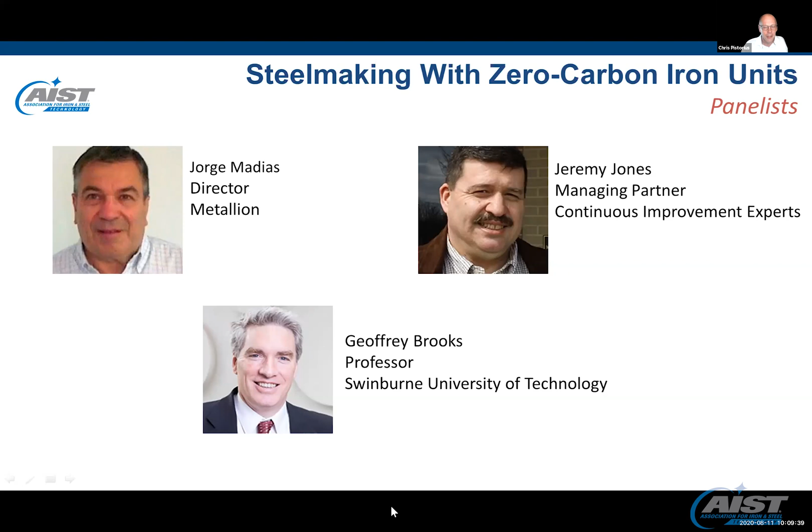Okay, so this morning we had a number of questions ahead of time as sort of a guideline. And one of them was, what are the greatest challenges for carbon-free DRI in EAF steelmaking?

Well, in general, as we try to move towards this low carbon footprint steelmaking, what we need to do is return to a lot of the fundamentals and understand why various technologies were adopted and adapted into the EAF, and how do we provide that same functionality without carbon-based materials.

So this involves things like the reason why we put burners in an EAF: we were trying to eliminate cold spots so that the scrap melted in more evenly, and we could achieve an efficient endpoint, achieving the temperature and carbon level in the bath at the same time.

So if we don't use fossil fuel to provide energy at those cold spots, do we use hydrogen-based burners? Do we use maybe ammonia-based burners? Do we use plasma torches? There are a number of different options which we'll have to look at.

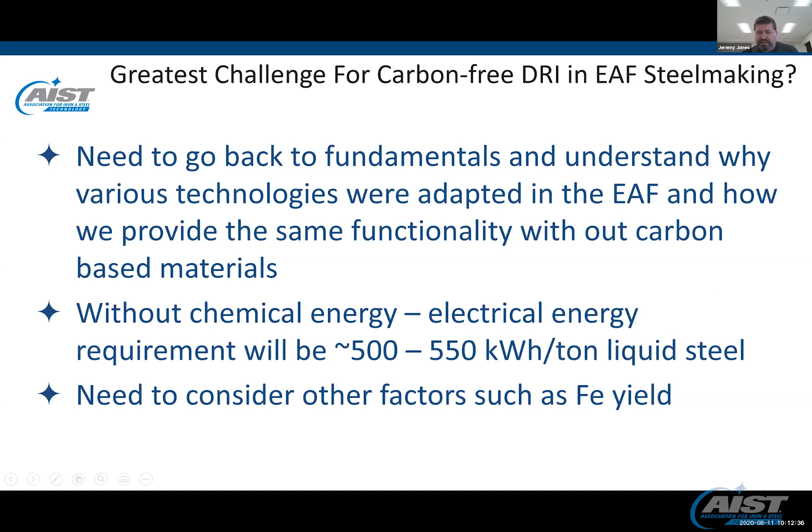Some alternative melting technologies have been proposed, including induction melting, but currently induction furnaces are limited to about 60 metric ton heat size, so that wouldn't really be suitable for a lot of product lines. But we'll have to look at it. There will be some application in smaller sized facilities, maybe some more specialized ones.

But moving forward, I think the EAF is a preferred technology, but it's going to go through an evolutionary process, and I think Geoffrey's going to talk about that a little bit. We could try to come up with a hydrogen-based pyromet process, and there have been, obviously in the past, hydrogen-based direct reduction processes that have been implemented commercially. Again, Geoffrey's going to talk about that a little.

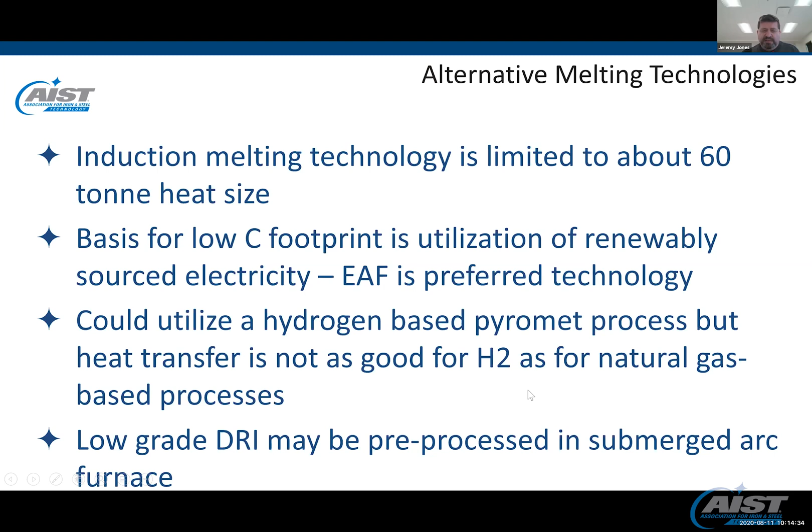And then we also have to consider exactly how we're going to feed these various processes, because over the past year we had a shortage of DR grade iron ore pellets. And that's definitely, as we try to expand the implementation of direct reduction further, going to be a big issue. Though some people have proposed that we use lower grade pellets with high gangue and then pre-process those in a submerged arc furnace in order to eliminate the impact on the EAF, or at that point it could be a BOF as well.

With respect to scrap or carbon-free DRI, the choice is really a function of what you're making and what you have available.

Until we find a way to remove residuals from scrap, ore-based metallics are going to be required to enable a circular economy in steel. If you look at the projections in the developed world, the generation of prompt scrap is projected to stay fairly constant through about 2050, while the amount of obsolete scrap coming back into the supply is growing quite considerably. So we'll have to figure out how we use that.

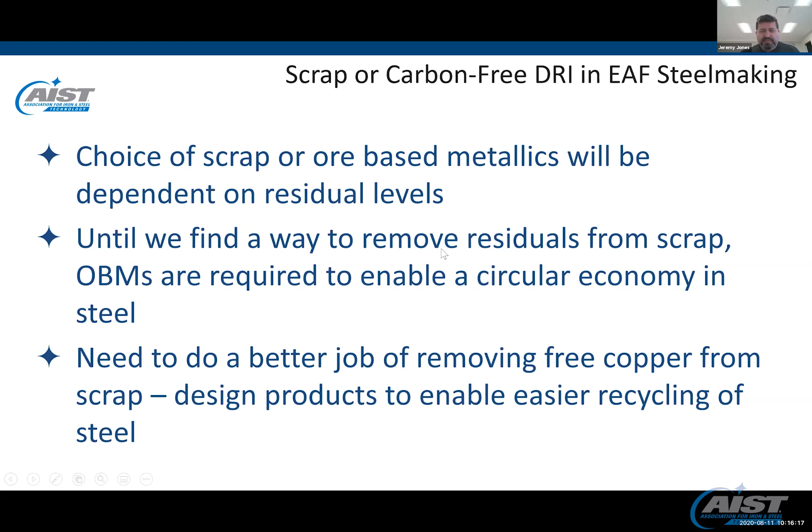We also need to do a better job of designing products to remove things like free copper from the scrap. Because, for instance, if you remove all of the free copper from an end-of-life vehicle, you can probably produce shredded scrap with about 10 points of copper. In reality, we see shredded scrap with copper levels ranging from 15 points to as high as 35 points. So obviously, in some cases, we're doing a very poor job of removing the free copper. The free copper is that copper that's not tied up directly in the steel, but is in other components in the material we're processing.

Several people have looked at biomass as a foaming agent. People have used things like coconut shells and agricultural waste in Indonesia. It was fairly common to see people use roasted coconut shells as a source of carbon. So definitely people are looking at biomass as a substitute for coal. But to truly be carbon neutral, we need to grow it as fast as we consume it. So that's something we'll have to consider.

These materials can be effective for slag foaming, but of course parameters such as size, ash content, and fixed carbon all factor into how effective these materials can be. There's a lot of work done at University of New South Wales on recycled plastics, and they found they could substitute about 30% of the injection carbon with plastics fairly effectively. But the issue is that the plastics break down much more rapidly than carbon does, so you're limited as to how much you can use because you get a surge of gas generated.

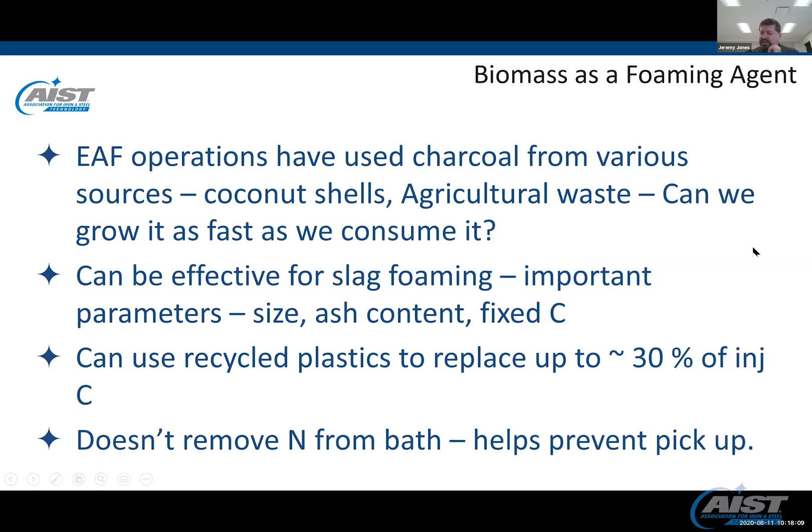And of course, all of these things, the slag foaming is important. We don't actually remove nitrogen from the bath through slag foaming operations, but we definitely prevent the pickup of nitrogen, and we prevent air nitrogen from passing through the arc and getting ionized and traveling back into the steel bath.

The other options for managing arc coverage, we've got several. We can foam with gases other than CO. We could operate with more slag mass and design the furnace to carry over a greater amount of slag, because it doesn't matter how we bury the arc, just that we bury the arc. Of course, a larger slag mass would be a slightly greater heat sink, but it could be manageable.

Of course, if you're working with materials that contain a lot of phosphorus, then it becomes an issue, because you have to flush the slag in order to get the phosphorus out of the steel and out of the system.

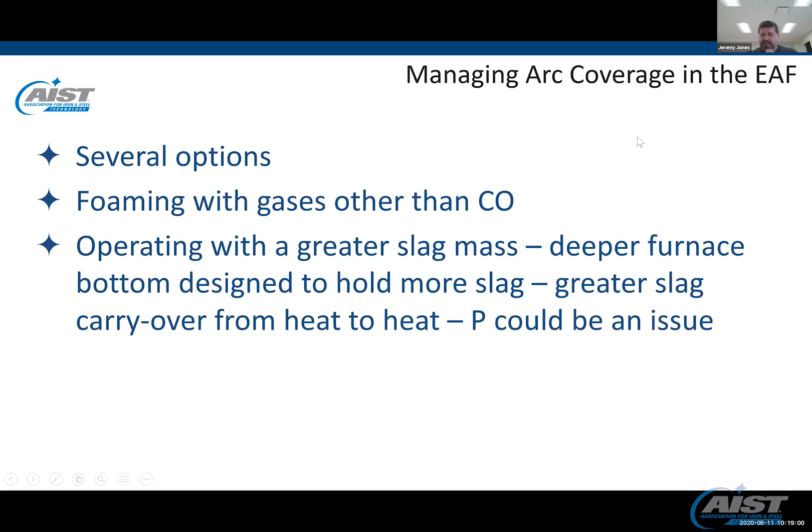Some of the other options, people are looking at various anhydrides, materials such as zeolites. Basically, we need to find materials that break down completely at steelmaking temperatures, that don't impact the quality of the steel, and that generate a lot of fine bubbles. So there are several options that people are investigating right now.

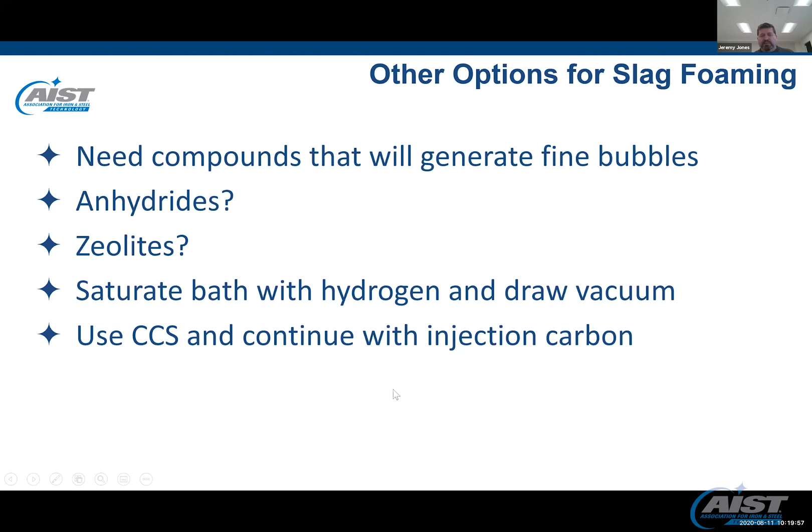And of course, there's always the option of continuing to use carbon and using carbon capture and sequestration. Currently, it's not a commercially viable option, but as we enter a period where we might be faced with carbon taxes, then things like that will become more attractive.

Overall, I think in the future it'll be very important to have a broad base of raw materials to draw upon, because you need flexibility in order to meet the desired EAF cycle times to match the rest of the plant for efficient operation. People have already shown that blending materials allows for lower overall operating costs by taking advantage of materials that are closer to the plant and readily available.

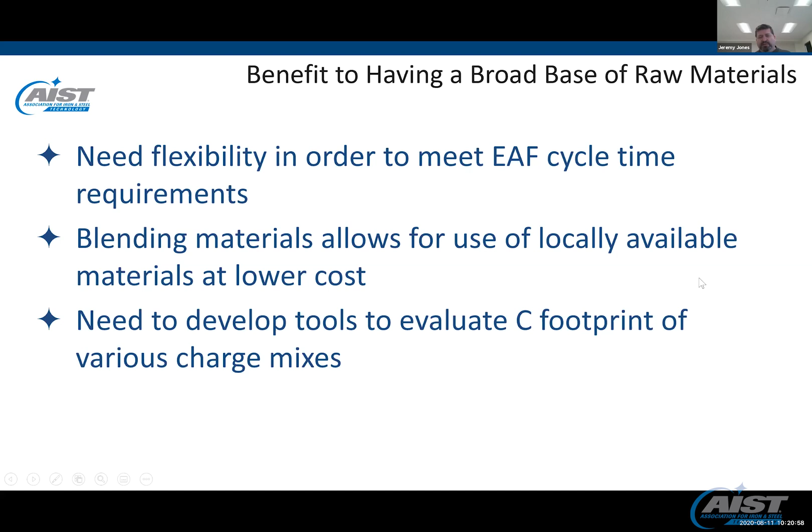But all of this comes back to developing the right tools and understanding the carbon footprint. And at CIX, we've actually been doing that. We've been working with several European plants to develop a model that allows them to quickly evaluate different operating scenarios and options with respect to the carbon footprint. And that's what I've got for now. I'll hand it back.

Okay. Sorry, thank you for the presentation.

Morning, everybody. A lot of food for thought from Jeremy. I will show some other things. Some of them will overlap a little bit with Jeremy's talk.

This is where we are today regarding CO2 emissions. On average, 44 kilograms of CO2 per metric ton of steel. Looking at carbon in the bucket and injected carbon, some 10 kilograms of CO2 per ton of steel from natural gas, and then 4 to 7 kilograms of CO2 per ton of steel coming from electrodes. Then we have, of course, other carbon sources such as scrap, DRI, pig iron, carbonates, etc.

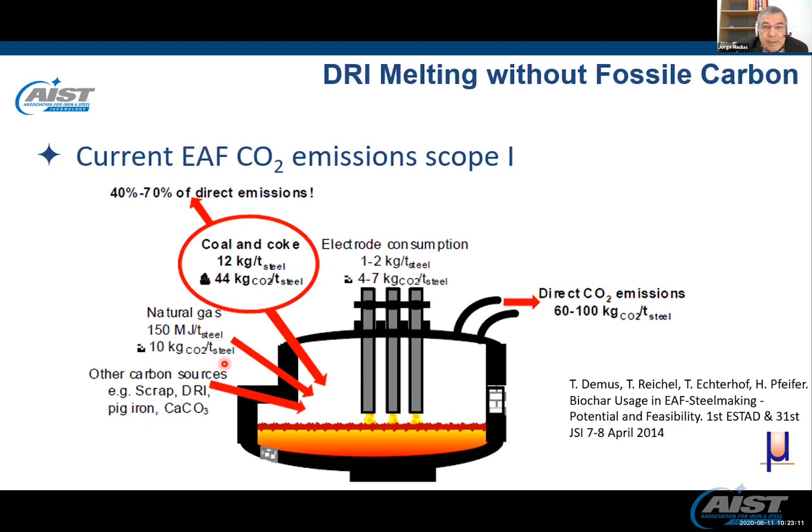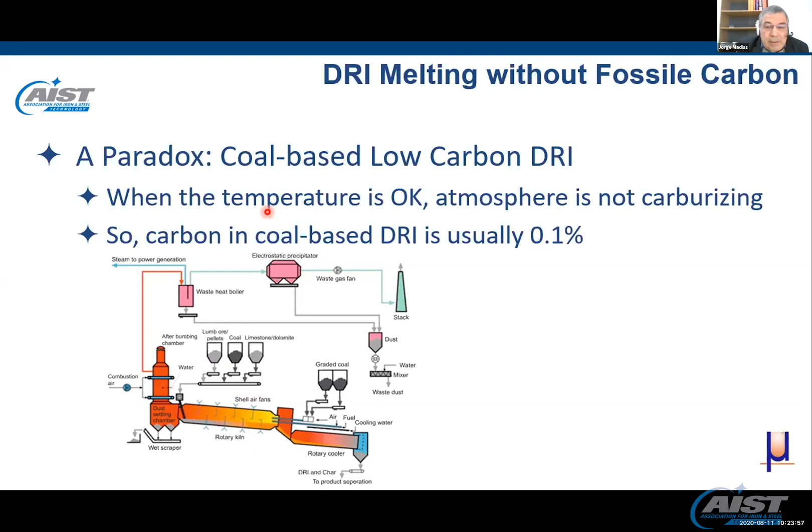I will go back to old times, as I am the oldest speaker here, to the paradox of coal-based low-carbon DRI. When we work with the kiln to make sponge iron based on coal, what we got was low-carbon DRI. 0.1 was normal, because when the temperature is okay in that kiln for recarburizing, the atmosphere is not okay. And then the opposite situation: when the atmosphere is okay, the temperature is not good for recarburizing. So we usually get low carbon in there.

In Latin America, we have had 3 plants, 5 units: Gerdau Charqueadas, what used to be Aços Finos Piratini, an SBQ producer, Siderperu, and Aceros Arequipa, both in Peru with 2 units.

Regarding Piratini, they had DRI from pellets and lumps, EAF melting with carbon from pig iron, as is usual in Brazil, and carbon injection with lances. Then further treatment in ladle furnace and vacuum degassing, ingot casting, and SBQ.

They were, of course, not very happy with that low carbon of 0.1, but they worked for two decades this way, until the DRI plant was idled. So, two decades with low carbon DRI.

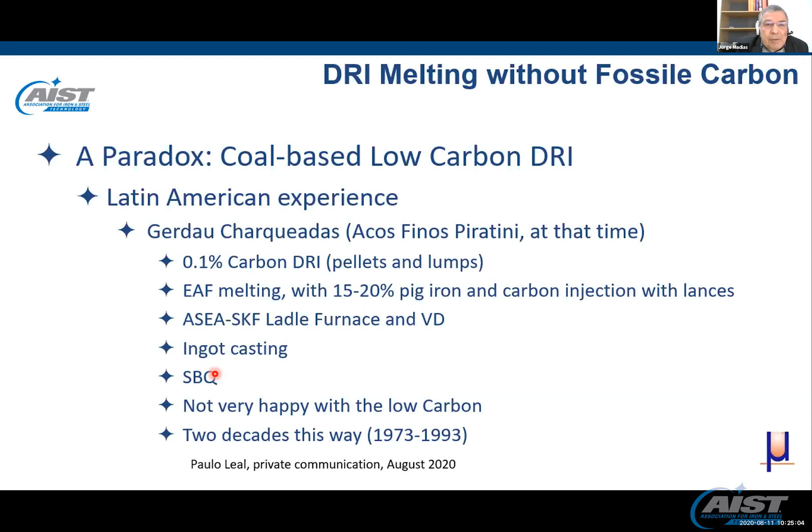In the case of Aceros Arequipa, the DRI was made of blast furnace pellets, curiously from Shougang—blast furnace pellets, not DRI pellets—and lumps from several local sources. It was also 0.1 carbon. A lot of R&D from their people to get higher carbon, testing natural gas injection at the end of the process, but it was very slow and somewhat expensive, so it was not practiced for a long time.

They melted this low carbon DRI with the so-called closed door process, developed by Jorge Uyen, the steelmaking manager at that time. 43.5 tons the furnace, 45 MVA the transformer, 3 supersonic lances. They used to charge 1 bucket HMS, then slag door closure before flat bath, continuous charging of low carbon DRI, and at times they also continuously charged shredded scrap.

Anthracite lumps to favor slag foaming. They used to have some kind of BOF-like slopping in some heats through the holes of the roof, with low FeO in the final slag of the EAF. So they worked like this for several years.

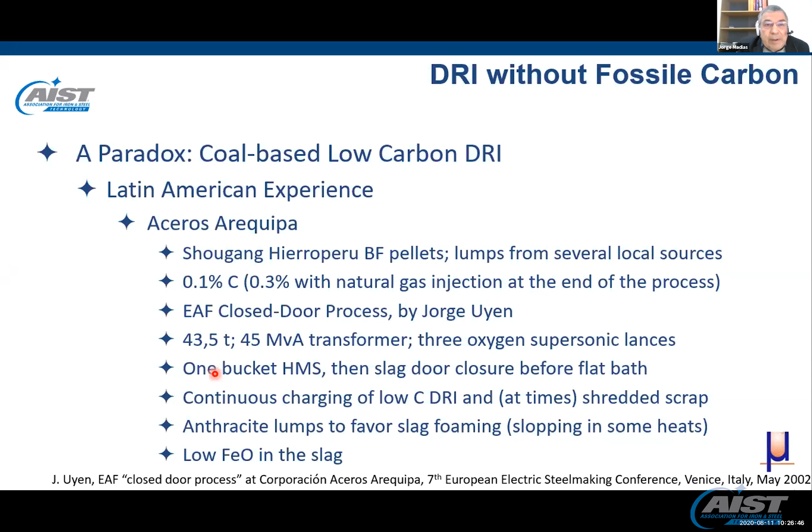Then we have the India experience, which they are still working on today, with a large number of coal-based DRI producers, some melting with EAFs, others with induction furnaces. Of course, with induction furnace we get rid of graphite electrodes, natural gas, bucket carbon, injected carbon, but there are some issues like the use of anthracite and pet coke for reduction of FeO in the DRI.

That is important stuff. You always have some percentage of FeO in the DRI. You build acid slag that must be removed during the process, coming from the gangue of the DRI. You could need some dephosphorization or decarburization. This is carried out today in only a few plants, with downstream oxygen stands for that purpose.

And then we have the scale problem, as mentioned previously by Jeremy. He mentioned 65, the largest Inductotherm furnace for steel. According to the Inductotherm guys, scaling should not be a problem, but I don't think that to be so easy.

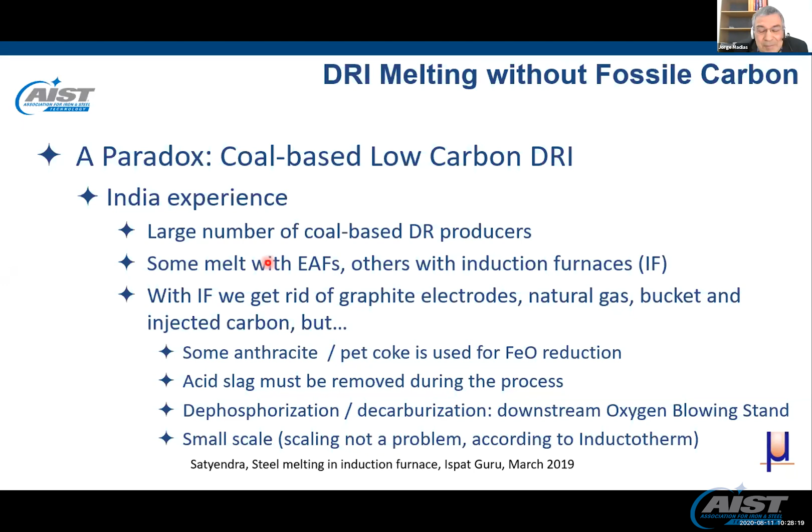This is a must, as Jeremy showed. On one side, we always have higher energy consumption with DRI, but then if we get rid of chemical energy, it should be even higher. So hot DRI charging should be a must for lowering power consumption, say 100 kilowatt-hours per ton less than normal.

So we will be in that case close to the numbers of scrap-based furnaces. We have different transport systems for existing and for greenfield plants: mechanical conveyors, transport vessels, as it used to be the first time I remember in Rio de Janeiro, in the Cosigua plant from Thyssen—the Purofer process with bottles under nitrogen to transport the DRI—pneumatics or gravity, which looks very nice for this purpose, as it has the shorter way from the module to the furnace, and so maybe lower heat losses.

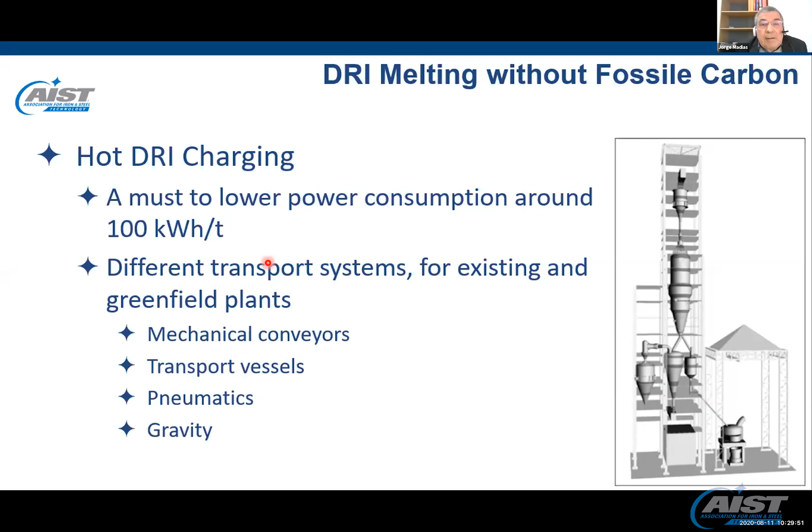Use of biomass from the European experience: lab foaming trials, pilot EAF in Germany, and full-scale tests in Ferriere Nord.

In Ferriere Nord, charging via buckets was okay, no problem, but in Georgsmarienhütte in Germany, char injection gave poor results. They thought of some re-engineering for the injectors. Besides what Jeremy mentioned about ash size, there were also issues with density and so on.

Waste tires, as mentioned by Jeremy, is practiced in six plants, coming from Australia. Maybe there could be some replacement of natural gas by hydrogen.

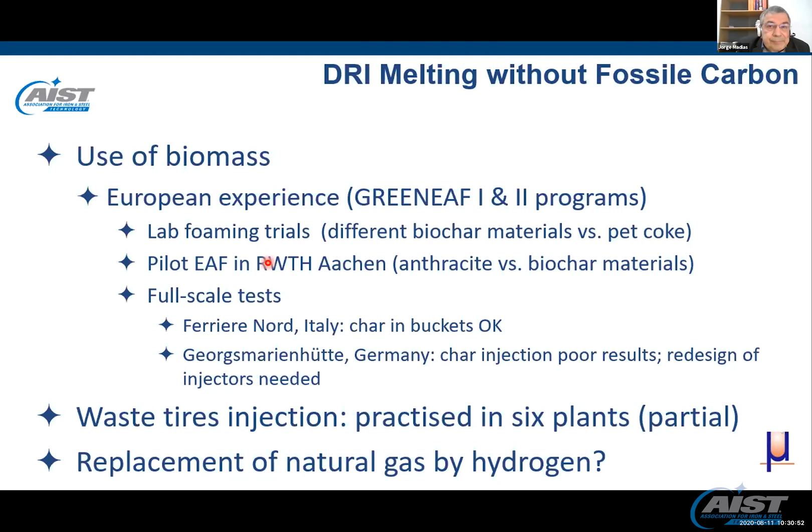Alternative foaming agents, also going back to the past. At the beginning of this century, some calcium nitrate co-injected with carbon was proposed for stainless. I don't know if it is still in use.

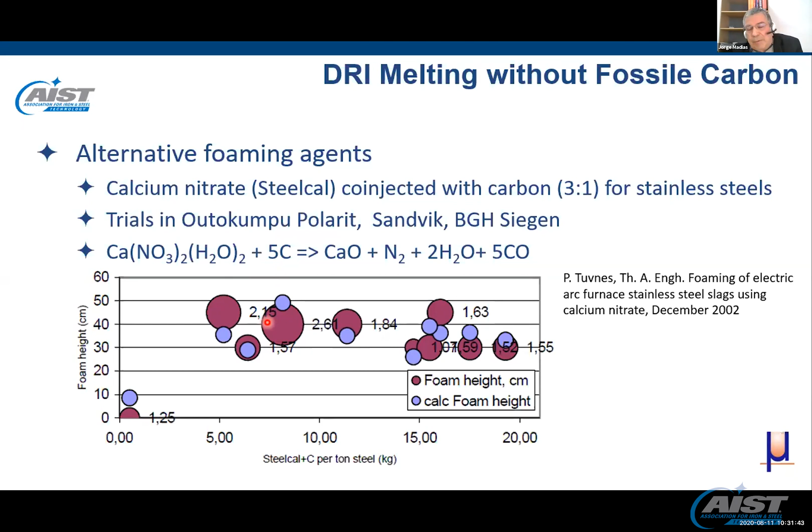Of course, in stainless you had the problem of low FeO in the slag, so Norsk Hydro had a byproduct from the fertilizing industry, and they made trials and tests in several stainless plants in Europe in the first decade of the century, getting some good results with this agent, just as an example of what had been done in the past with alternative foaming agents.

Okay, this is all I have for today. Thank you very much.

Just as a comment from a little bit of work I did on SL/RN DRI: it's not only low in carbon, it's also high in nitrogen. It contains maybe 150 ppm of nitrogen, so not an ideal material for steelmaking, that's for sure.

So let's talk through some of the basic things, summing up a fair bit of what's already been said. Obviously, if we have a very low carbon iron source coming into EAF steelmaking, we have less steelmaking to do, so that has some productivity repercussions.

It also has some potential to be a good thing, because the removal of carbon is actually a reasonably slow process in steelmaking. If you have a lot of low carbon DRI coming into a process, you're going to be melting and then basically taking away molten oxide, so you're really reducing the steelmaking somewhat. But you're also going to bring less chemical energy into the EAF, which has already been discussed quite nicely by my colleagues, and you've got to take that into account.

And as just explained, you've got this whole issue of flushing. I thought Jeremy explained that very clearly, that you basically have this issue of where are we going to generate bubbles low in the melt so we can get rid of the nitrogen? So that could be a real issue.

We've already had a nice discussion about slag foaming, and I noticed one of the people who raised a question already said, surely this is going to increase oxidation, FeO in the slag. I think all your professors that taught you will be very happy that you remember that relationship between low carbon and FeO, and that logic is sound. Basically, we're going to have very low carbon in the melt at some stage, which is likely to generate high FeO in the slag, so we're going to have to do something about that.

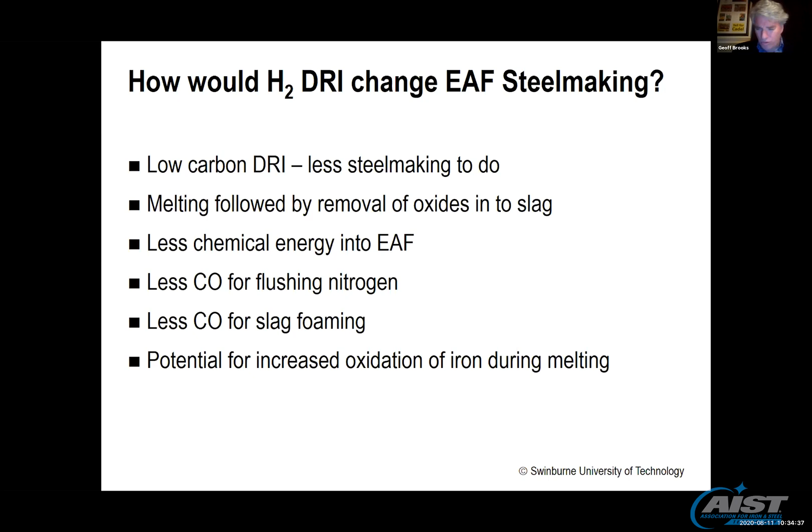So these are the issues you've already heard a bit about, just to sum them up in one slide, and to remind you of a few basic things that need to be brought out.

If we go for the idea of lowering the carbon footprint of steelmaking by using hydrogen, that's only one part of this process, because we know that if you put more DRI into an EAF, you generally increase the energy usage. The graph I've got here is a bit idealized - I don't think it's quite as neat as that. It's a more complicated story, but basically the more DRI, the more energy and CO2 you're going to generate with the existing technology.

So you're going to have to look at the whole system - as Jeremy mentioned, how's electricity generated? What's the chemical energy we're bringing into the EAF? I think just looking at the iron and saying we're making it with hydrogen, therefore that's great, is too simple. You've got to look at the whole system, and that's going to be important.

And the other thing that's also come out, which was nicely brought out previously, is that DRI is not DRI - there are many types of DRI. I have here a table from a paper by Hornby Anderson, and she's got like 6 different types of DRI there, and you can see quite large variations in the carbon, variations in the gangue.

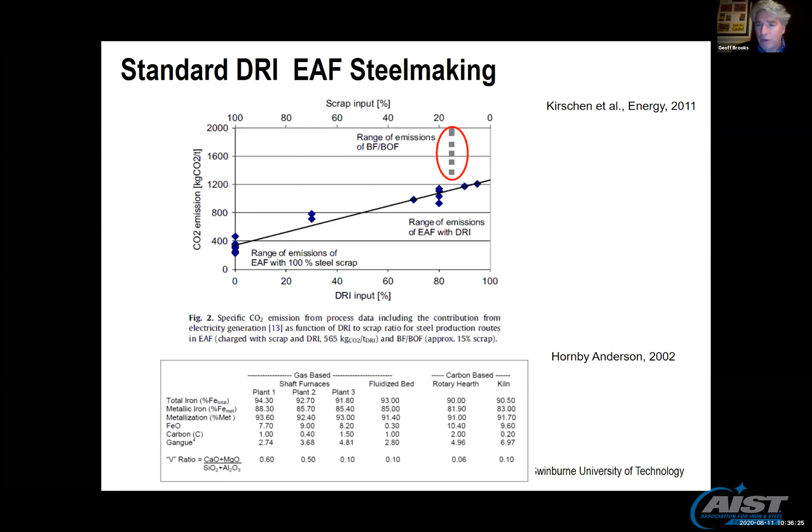That's going to be the same if we go down this route. If we have a lot of hydrogen production of iron, we're going to have all sorts of variation in the chemistry, depending on the ores, depending on the route. It's going to be another complex story - it's not going to be all the same. So take that into account when we're talking about DRI in a very generic way. There's a lot of variety in DRIs, as I'm sure many of you are aware.

I noticed one of the questions already - I think Phil Mackey is asking about the energy balance. Well, if you look at a typical EAF, you get something around 50% of the energy coming in as chemical energy. So if we start taking carbon out, that's going to affect that balance, and we have to complement it with some electricity, as Jeremy had a guesstimate on in his slide, and he's probably right. So we're going to have to push the electricity up or find another energy source if we take the carbon out.

So you're going to have to redo your balance - you're either going to have to push up the electricity, or bring in some other energy source. So that's just looking at the basic logic of what would happen if we had a low carbon iron coming into our EAFs.

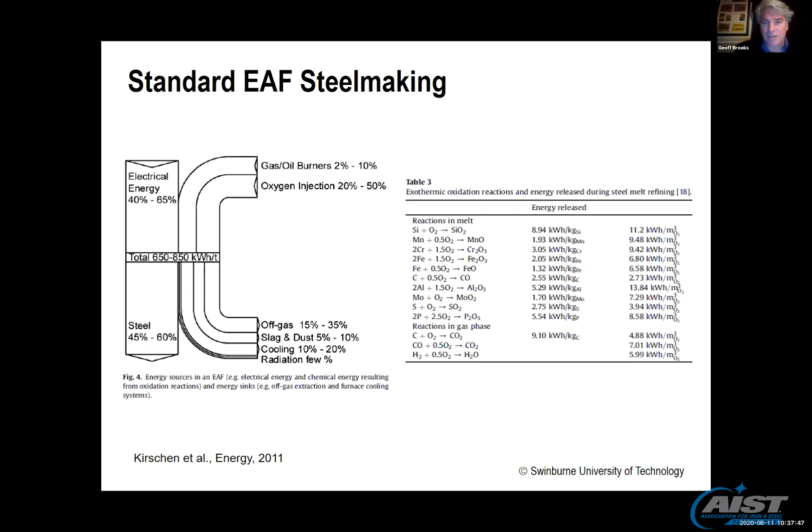Now, fortunately, we do have some significant results to look at - there have been people who have made significant quantities of basically zero carbon DRI. This is the Circored process, which was operating for a number of years. It was developed as a fluidized bed process, Outokumpu were developing it in Germany, and then it went over to Trinidad and operated there for a number of years. This process is fairly complicated - you always find that when you try to replace the blast furnace, you end up with this quite complicated system, because you've got to replace a lot of steps that you have inside a process like the blast furnace.

And from that, they got up to metallizations of about 95%. Now, this process in Trinidad used natural gas as the source to make hydrogen. There is quite cheap natural gas in that part of the world, so they were able to use that cheap source to put hydrogen into the process.

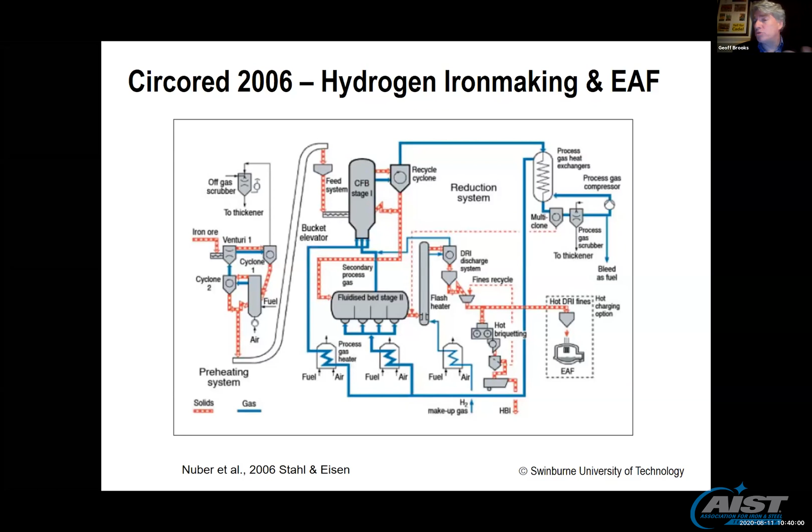Anyway, they produced significant quantities of HBI from this process, which was then sold to various smelters, so there's quite a lot of accumulated experience from that work. They produced over 300,000 tons in the most detailed paper I can find on it, and I've put the reference down there. I suggest all of you who are interested in what happens when you put zero carbon DRI into a process should read that paper.

They reported that if they injected carbon into the slag—the problem already brought up in one of the questions about what would happen with the FeO—they had to inject carbon to keep the FeO at a reasonable level. I'd describe 28 to 35% as relatively high FeO, but not unacceptable depending on your slag volume. So they had to put carbon in, and also inject carbon and oxygen to keep the FeO down, but also assist foaming. They found it necessary to have some carbon and oxygen coming into the system.

They also found that when they used a large amount of DRI compared to scrap, it was best to feed continuously into a large heel, which makes sense—you have a big pool of molten metal, and you try to feed continuously or semi-continuously into that large heel. When you do that, they mentioned it's very important to match the feeding to the heating so you don't get large icebergs. You'll have to pay attention to matching the heat input to the heat requirements, because you have the potential for a whole lot of unmolten iron sticking together and forming an iceberg, which is not desirable in an EAF.

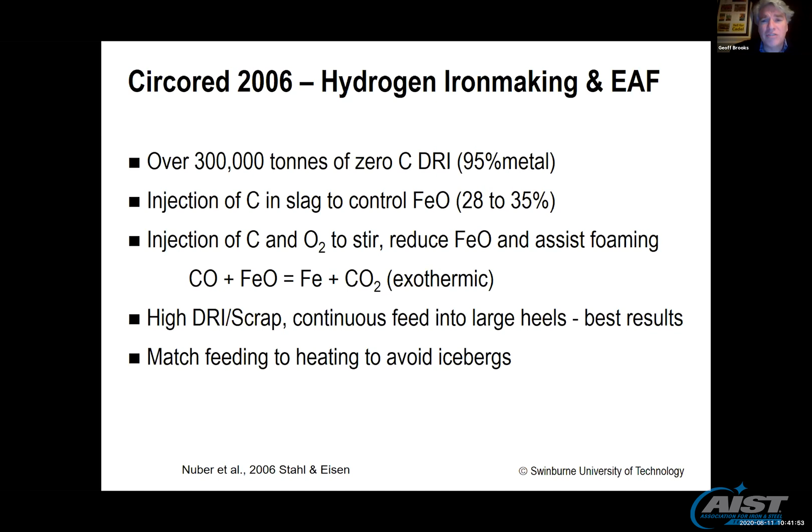So that was the general experience they reported in that paper, and it all makes sense to me. They do a diagram showing the importance of making sure you get some carbon and oxygen deep in the bath so you can stir the bath and help flush out the nitrogen, as we've already been discussing. They also advocate putting carbon into the slag. So you can see straight away your desire to get rid of carbon from the process is compromised by all these requirements to remove nitrogen, foam the slag, etc.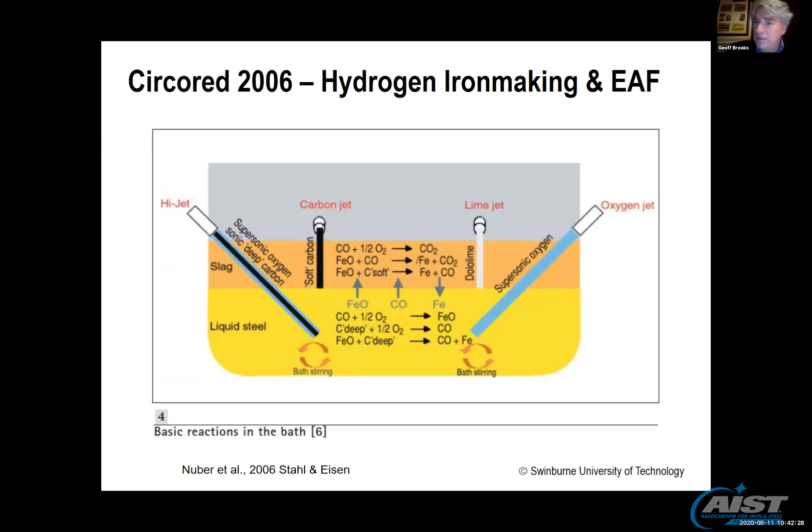And they report some hard data in that paper, so I do suggest some of you look at that if you'd like to know the details.

So my thoughts at this stage—I don't think it's too early to have conclusions in this area—are: clearly on a brownfield site, if we suddenly built a hydrogen ironmaking process tomorrow and tried to bring that feed into an EAF, we obviously need to redo our energy balance. We're going to have to bring in some other energy from somewhere, and we better be careful about what the carbon footprint of that energy is. Otherwise, why are we bothering with all this hydrogen production of iron? We have to be conscious of that.

We're probably going to have a large heel, and if we don't have a large heel operating, I reckon we're going to have lower yield—I think we're going to start losing a fair bit of FeO at some stage. On the positive side, I think we should be able to push up productivity. We've got less steelmaking to do, less stuff to do, so we should be able to push the iron quickly through the process if we've got everything organized well.

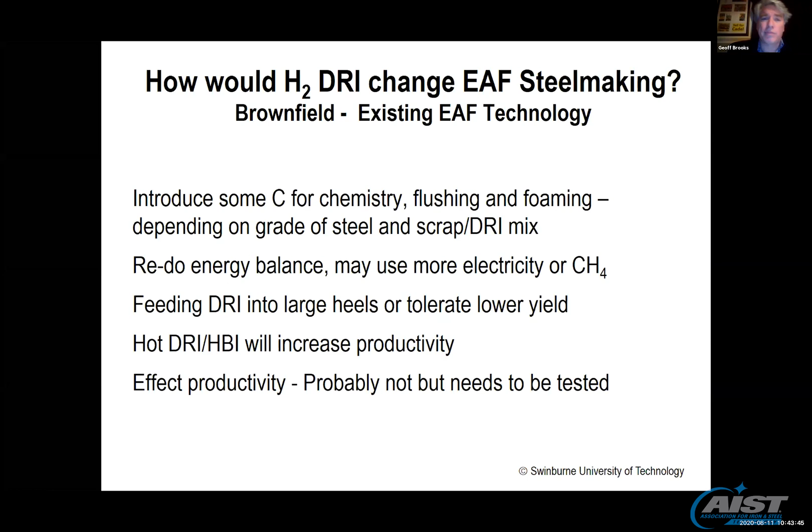Obviously this productivity issue needs to be properly explored, but there's real potential for improving productivity. Now, if we go the other way and imagine we're starting again, we've found some very friendly investor to build a whole new process around this low carbon DRI. Well, now I think we need to rethink the whole thing.

Because basically, when you look at this low carbon DRI, there's not a lot of steel making to be done, so we should be able to get some advantage from that. And I actually start questioning whether we need to have two separate processes anymore. Do we need a separate ladle process after the melting? If we have that little steel making to do, why don't we think about putting them together? I don't think that's a ridiculous notion.

I think you could imagine collapsing two steps into one. I think you could get very high productivity if you really start thinking about ways of designing the process around that feed material. And you might even be able to have continuous output.

I remind everybody, we have steel making - I love steel making, I've been working on it for a long time - but it's a batch process. Everything on either side of it is continuous. Most good iron making processes are continuous. Casting is continuous. Rolling is continuous. It's us steel makers that want to cook things in batches.

Well, there is a possibility that you could turn this into a continuous process by having some innovation in how you refine the steel before it goes into the tundish. So I think if we're going to have a greenfield site, we should rethink a lot of these things, and we can perhaps find some big advantages to productivity and the size of equipment.

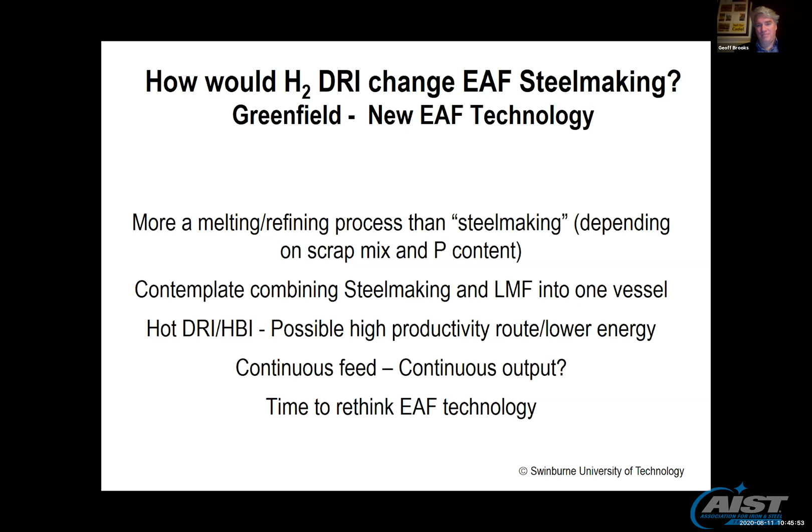Thank you very much, Geoff, and thank you again to all our speakers. We now move into a period of question and answers, and we've had some excellent ones from the audience, so please keep them coming. I'll start with one for you, Jeremy - it's a slightly rephrased audience question about what we need to remove nitrogen from the arc furnace, and it talked about different carbon-bearing materials like recycled plastics, how good they are at removing nitrogen. So my question is, briefly talk us through what we really need to remove nitrogen, and would any of these other things work at all?

Yeah, so just to reiterate and reinforce what I said - when we're slag foaming, that operation doesn't remove nitrogen, because generally we're having a reaction at the bath-slag interface, which is where the FeO tends to concentrate. So we're injecting a material, and our objective is to get it to spread out across the bath surface and then generate a lot of fine bubbles, which helps to foam the slag and shield the arc.